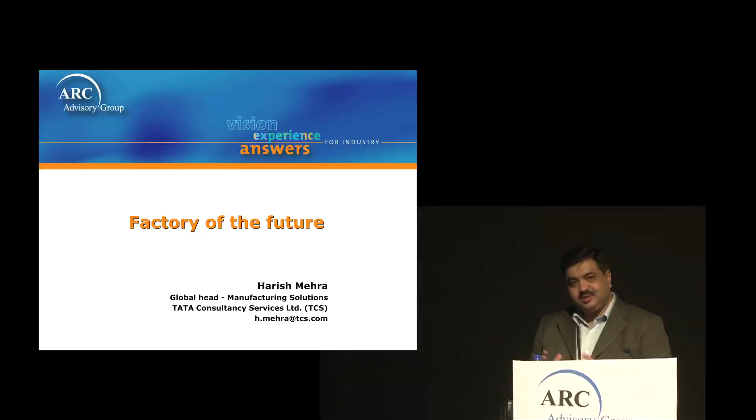Thanks ARC for conducting this session, giving us the opportunity to share Factory of the Future as a concept. We have a very good first half session. A lot of technical know-how has already been shared in terms of what is happening in the automation space. My attempt would be to thread all these pieces together to create the plant of the future.

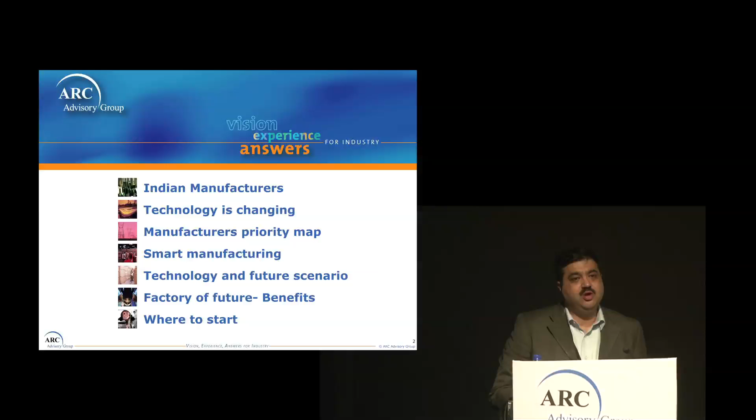Second important aspect is the usage of technology, which is IT, in plants. And IT is becoming more and more important to remain competitive in the marketplace. Technology adaptation in the plants, in all this.

I'm just sharing some statistics with you. India, many reports talk about how we are increasing our innovation in domains like biotech, pharmaceutical, auto tier 1 manufacturing, even in assembly operations. The norms of the industry are changing because most of these organizations are getting into a global context also.

Operational excellence is now becoming extremely important; it is no more a fancy feature for the manufacturers. It is becoming a norm of the industry.

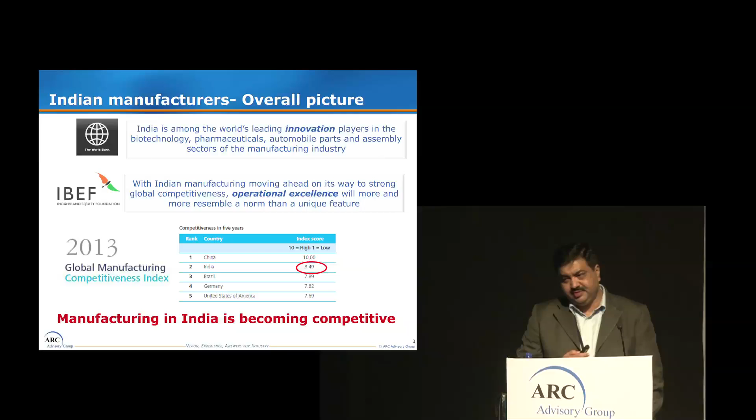There is also a survey note from the Global Manufacturing Competitiveness Index, which talks about manufacturing competitiveness across various countries. India today stands fourth, and in the next 5 years there is a projection that India will move to the second position in all this.

There are many factors which influence manufacturing competitiveness - internal factors, external factors - but the most important factor where we lag very badly vis-a-vis other countries is physical infrastructure. This physical infrastructure has more than 20 different elements, but among the top 4 is IT and telecom, apart from availability of good quality electricity and other infrastructure needs.

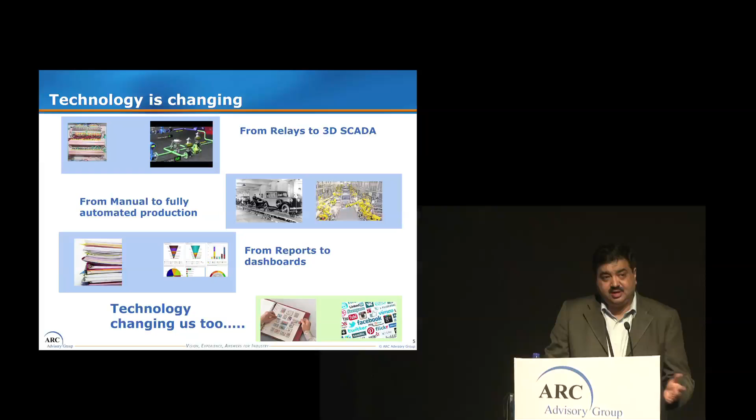The whole attempt of this session is to see how IT can make the difference. But before we enter into this technology, let's have a look at the technology which is emerging in typical plants.

I remember when people would go to the plant, go to the equipment, take the analog reading, and note it down on a piece of paper. Today, some of our potential customers are demanding that they can see, sitting here, visualization of that information. So it's a sea change.

I myself have commissioned plants using Mimics and the control board. Today we are talking about the ability to control something sitting remotely.

There are many changes with the information which plants generate. Traditionally, people were talking about information used for generating reports. We are talking about how these reports can be converted into dashboards, and if the dashboards can do some prediction associated with assets and all.

Many previous speakers have covered these points - so important is technology in manufacturing, in plants, continuously changing and improving. It's a matter of adaptation of these technologies and how you want to see business imperatives are met.

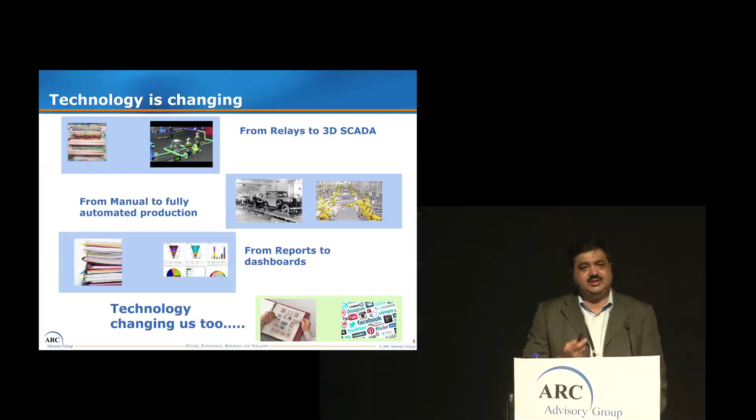A typical manufacturer, even the executive management, faces tremendous pressures when it comes to the manufacturing environment. Compliance and energy efficiencies are definitely there. Because of globalization issues, plants are under pressure to bring visibility to decision making, since these plants are in the middle of the whole supply chain processes, and the make process makes it very critical - if I'm not strong in that piece, the business is not that good.

Cost pressure is always there for manufacturing facilities, for plants, and the prime reason is a 1% improvement you do directly hits the bottom line of your balance sheet. So it becomes an obvious choice for CFOs, CIOs, and CXOs to look at how best we can improve on this.

Innovation is one more important aspect, with respect to the products which you are introducing in the market. It can be next generation technology, or it can be disruptive technology. But you can design a single unit which can be special - making it commercially available, and in a global context making it available across geographies, is a challenge.

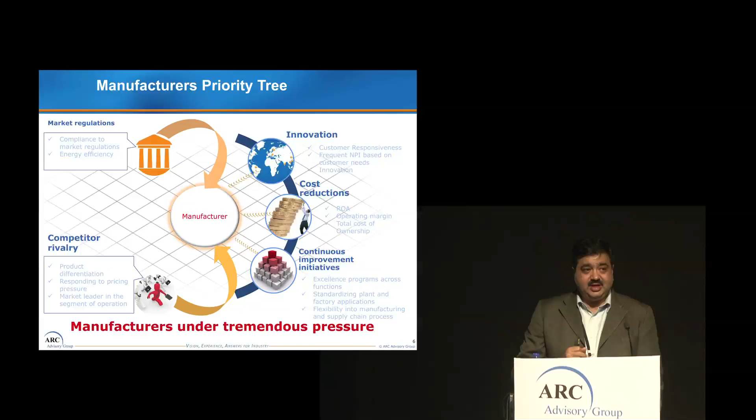We see - I can give you a very simple example. P&G makes these diapers. If one change in the diaper specification takes 4 months to launch globally, by the time the whole market is gone. So the whole new product introduction and keeping the differentiation in the marketplace is important.

And it's only possible when plants are enabled to the next level. Continuous improvement, the investments which you have made on assets, return on those, improving inventory turns are other critical factors which keep getting monitored by management people.

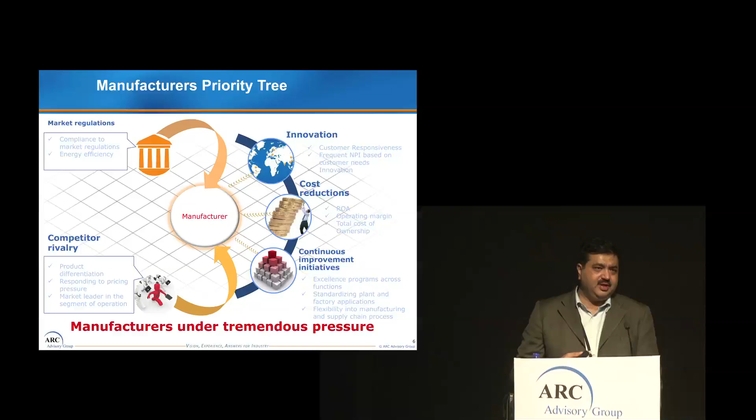Now, how are we going to achieve this? We are introducing a word - we need smart manufacturing, or we need smart plants, for all this. This is a typical diagram of an integrated enterprise, and let's see what are those attributes which we are discussing since morning.

I'm just summarizing those through this. A good manufacturing facility is tightly integrated with their business systems, and they are adaptive in nature because demand is not constant.

Gone are those days where you produce, you stock, and you have a sellable market for all this. So you need to see how plants can adapt to demand changes and vice versa. If there is a downtime in your plant assets, how can that information impact your order fulfillment process in supply chain.

Today, everybody is talking about well-connected plants. In order to have effective energy management, plants should be connected within their own facilities to their suppliers, so that any change you make in the plant is in conjunction with the supplies you're supposed to get from your supplier communities. And in the whole process, what you're trying to achieve is reducing your inventory, which is indirectly related to your cash flow cycles.

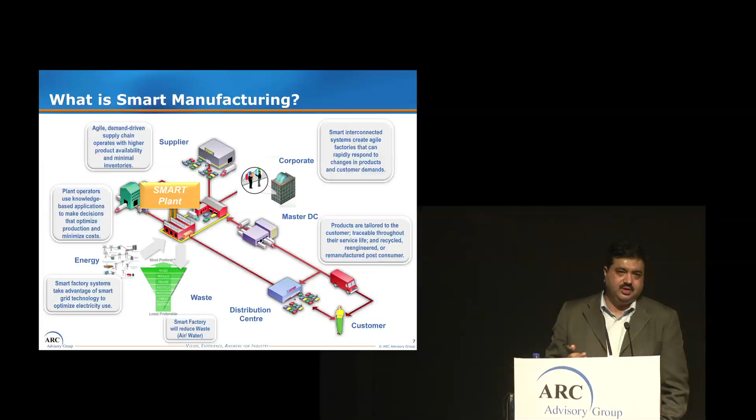Another big aspect is customers are demanding a lot of traceability across the value chain if there's an issue with the product. You might have heard of the callbacks Toyota is making, or the drug issue with Ranbaxy. If they are smarter, they'll be able to pinpoint the exact batch on which the correction or what went wrong applies.

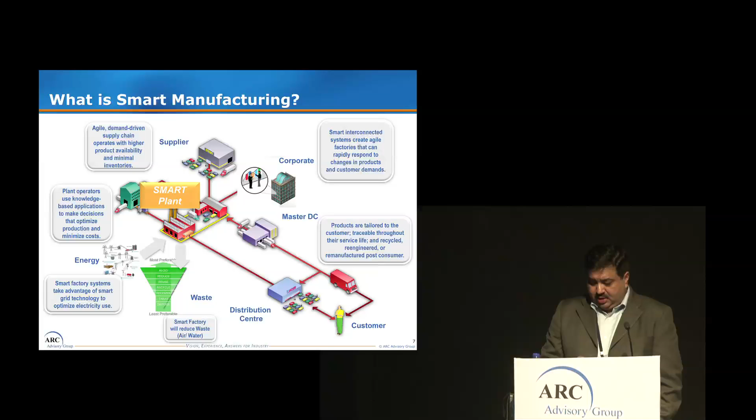Now this is not easy, and it's only possible when the plant from inside is smart. We talk about all these peripheral systems where it needs to interface, but the foundation, which is the plant itself, should be intelligent. And it's not easy at all to make a plant intelligent. My colleagues were talking about complete integrated engineering of plants all the way to controllers.

The reality is, within a single plant, you have maybe 4 or 5 types of controllers. Because the plant uses different processes, and there are inherent benefits of certain technologies which are better, and maybe you're buying some equipment that already has a tie-up with some company, you finally land up with multiple controllers at the plant floor environment.

Today, a lot of discussion happened on the sensors which are actually sensing devices, or the instrumentation sensors. They are enriching more and more embedded technologies going into these sensors, and there is pressure on the plant networks to transmit more data.

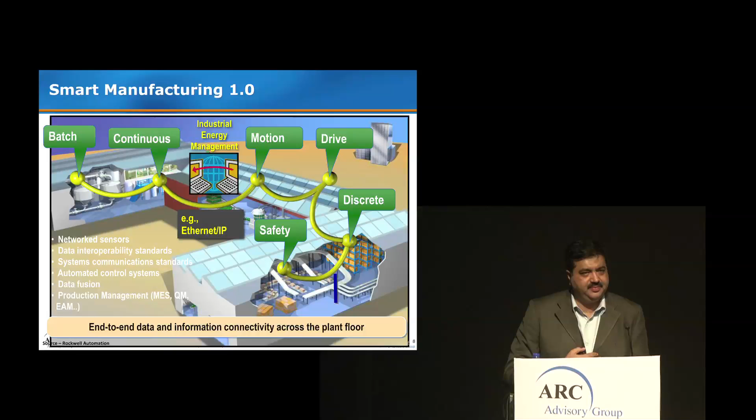Second important thing is plants don't have a single ERP, like one Oracle or one SAP. So finally you land up with multiple applications: some doing production management, some doing asset management, some doing quality management systems.

They are all referring to the same asset in a different form, in a different context, and they also don't talk to each other. So there is a second level of need to make plant applications communicate to each other by using, say, architectures like service-oriented architecture, where you can manage the master data information of the plants, of the plant equipments.

So finally, you land up in a situation where you have end-to-end data. Now, since morning we are talking about data, but we are talking only the data which is generated by sensors and the controllers. What about those data which is generated by my CCTV camera which is installed on a kiln outlet? What about those image processing systems which is generating the movement of the paper when I am actually winding it? So there is a lot of unstructured information also which exists in plants.

And I will cover that in my big data discussion, how that additional information can be used. Now with networks like this...

There was a discussion on remote monitoring. Now with networks like this, on the same network, I can transmit data, I can transmit images, I can transmit voice. So it's not only the trends which you are going to see in a remote location. A web camera can actually be focused on the crack of the asset. You can actually monitor it sitting 200 kilometers away. And you can pick up your phone and actually talk on the same network to talk to that guy. So today, futuristic plants are talking, enhanced by using technologies which are well established in business systems.

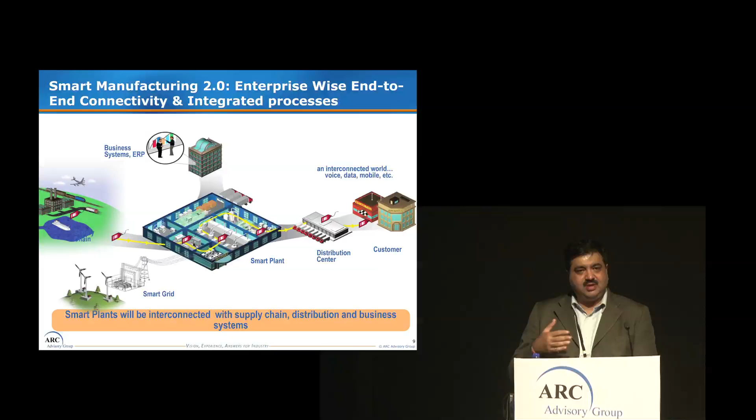And last but not the least is the data which is generated by the plants. Now this data needs to translate into information. This information needs to translate into knowledge, and this knowledge needs to translate into wisdom. Now, how I will generate the wisdom and how I will convert all this data is by putting the data into a context.

Now, once the data is in context, and this is what we are traditionally doing, generating MIS reports, reporting what went wrong, reporting it back to the management. It takes 30 days, maybe 2 months to collect all this and generate it. With the foundation which we discussed in Smart Manufacturing 1.0, we can actually enable it very fast.

This information needs to club with the business system information to do a lot of analysis of this information, which can finally be converted into dashboards and KPI monitorings.

Visualization can be role-based, so you can access the data as per your security, as per your profiling. A VP of an operation wants to see data in a very different context than an operator. So all those things can be managed if the structure, if the foundation, is like this.

And the most important, which the previous speaker has also talked about, is the ability to do predictive analytics. Mr. Andy and other people have talked about, can I run the plant with the past data? Can I simulate those mimic operations and do predictive analytics about the possible failure of an asset, which is a direct loss, a waste and direct loss to my capacity, or it can be in conjunction with the quality. Again, it's a waste because any defect or rework which you want to do will impact your throughputs or the efficiencies. And it can also be related with your energy, the energy patterns, and the ability to predict that this will go and improve further.

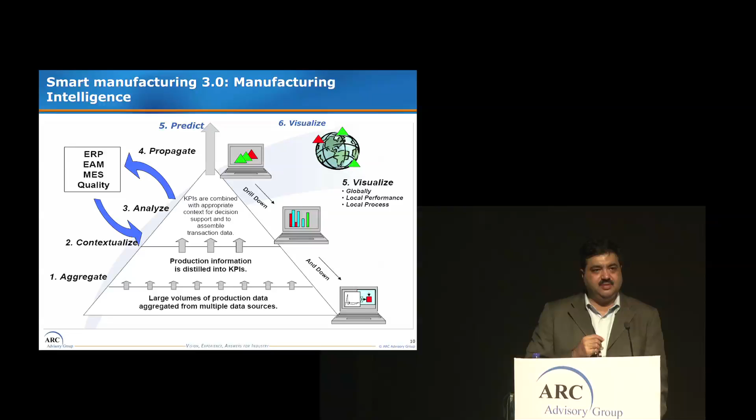I'm not going to talk much on the new concept which is emerging, which is machine-to-machine connectivity, propagated by almost every country, whether it is Singapore, Germany, Europe, America, everybody is talking about Internet of Things. Just as a very small introduction, because there is a very detailed session tomorrow, the world is treating everything as sensors. This bottle might have a sensor, your phone has a sensor, your asset has a sensor, even a BP machine will have a sensor, a CT scan can sense.

And all this is happening because a lot of embedded technology is going into this. Today, if you take an example of a car, I think it has more electronics than steel, and it can transmit a lot of data.

Now, this data is unused until you use this information effectively, for the monitoring purpose, as well as for the diagnostics purpose, and maybe for the predictive analytics purpose.

We are talking about smart products, a product which can transmit this information, a smart plant which can produce this smart product, and the services which can be enabled, which can be remote monitoring and diagnostic kind of services, built on top of it.

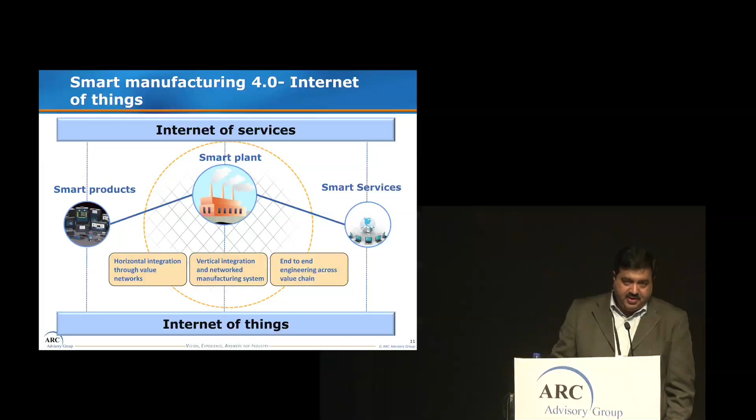Think of a BHEL turbine installed at an NTPC location, and the turbine has the intelligence to transmit data from the NTPC facility. And people can do analysis which can lead to giving information back to NTPC that these are not the engineering parameters on which I have decided this turbine.

So you better increase this pressure or increase this temperature. Or you can do the analysis for the improvement of the design of the turbine itself.

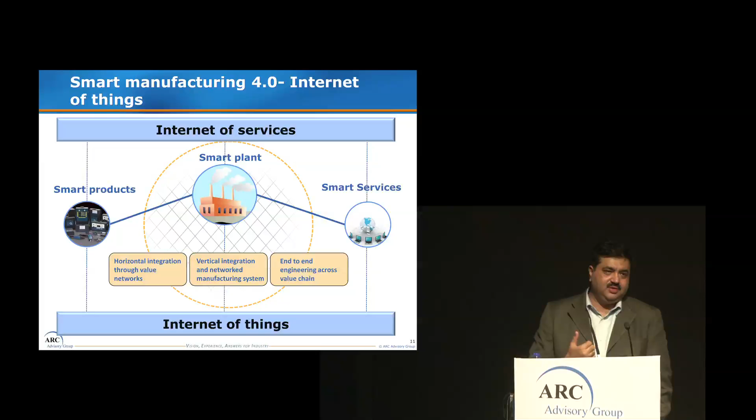So this is all possible today because technology is helping, or Internet of Things is helping you to achieve all this. Now there is a fusion and a lot of jargons, and this is maybe a slight constraint. My colleagues have put in these numbers and I can fill it with so many other pieces of information also.

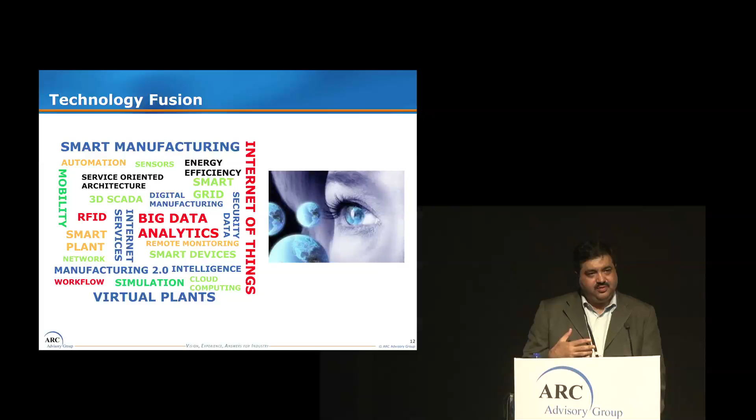There is a fusion - RFID, 3D tagging, 3D SCADA systems, energy management, smart grids, virtual plants, virtual digital manufacturing facilities and all. These are all technology fusions which people are adopting for operational excellence and for innovation needs.

A very good example is digital manufacturing, where today you are not setting up the plant on an Excel sheet trying to balance two different lines, identifying the capacity constraints, but you are actually building the whole prototype of the plant itself.

And why only the plant? I can actually take the whole supply chain network. I can take your numbers, your growth pattern, which you have projected or your CEO wants to project, and simulate all those situations upfront, telling you this is possible, this is not possible, this layout is good, bad, you need more space, taking a capex or opex decision on whether you should do it now or later.

So technology is changing all this. It has changed the product space. Today, manufacturers like Toyota don't want to crash a physical car to tell you what the data is - they can actually simulate all this.

We are talking about all these technologies coming all the way down to plants where you can simulate material flow, and in future, who knows, there will be chemical models available to know the behavior of a boiler, or with the data you can actually simulate and develop all this.

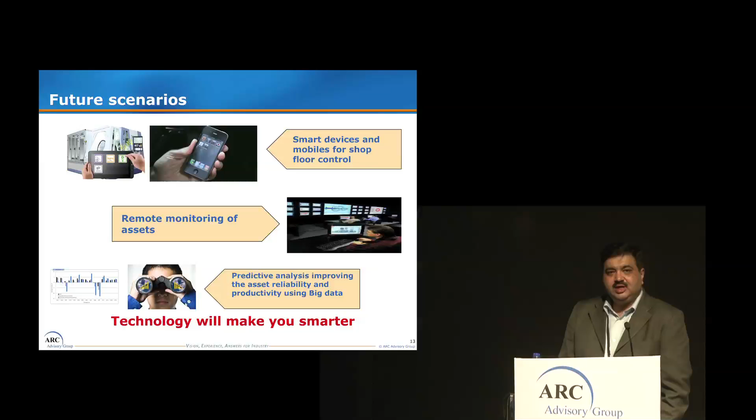We definitely see smart devices and mobility impacting the plant floor. You can think of view anywhere, operate anywhere. It is possible - we are deploying these solutions as TCS with some of our customers.

Remote monitoring and diagnostics - there was a discussion which is read-only. That is very much possible. We are today, in our own office, monitoring all the chillers at TCS buildings at the Pune facility in a cloud environment. I can tell you exactly, every minute, what happened to that chiller.

And another most important thing where the entire focus is going is predictive analytics. And why predictive analytics? It's because we are not in that world where we want to postmortem things and then improve. We want upfront, because data is there, to know upfront what is going to go wrong in future.

And here, these analytics don't restrict your thought process only to time series data, or just the sensor data of the PLCs and controllers.

You can build this with unstructured information, and you can use traditional models, statistical models, and all other models. You can also use big data techniques to do this analytics and model building, which will reduce your resource requirements. It also allows you to manage a variety of information, which can be time series, which can be RDBMS data, which can be unstructured information. Big data is actually changing all these aspects.

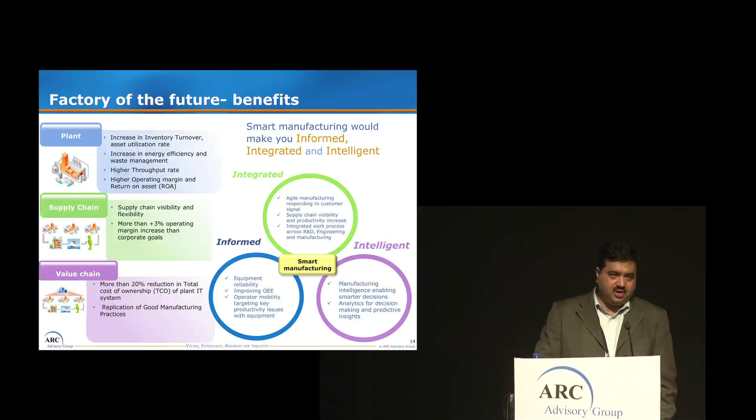And not only benchmarking, but generating good practices out of it, which can further improve other parameters, and which other plants can actually adopt.

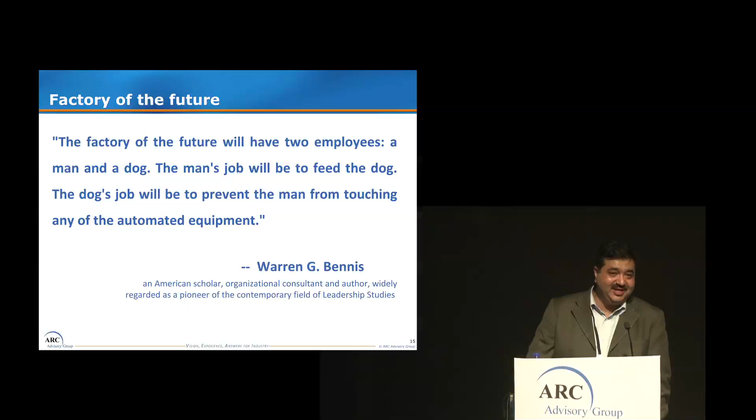This is the saying of one of the scholars - I don't know in which year this will be realized - but they say the plant will be so highly automated that there will be only two physical employees: one is the dog and one is the man. The man is going to feed the dog, and the dog is going to keep the man away from touching the equipment. That's the kind of dream global manufacturers are going with.

Now, of course, it's a transformational journey. It's not simple, and you need to take baby steps to realize the benefits. These are multi-million, multi-year programs which give you delta incremental benefits, but you need to carry a bigger vision of what you're actually trying to achieve.

This is the stepped approach, and on the same approach we have built a comprehensive framework to help our customers achieve these objectives. The plant is the foundation, the place where data is authored, and it needs to adopt different systems for its own benefit.

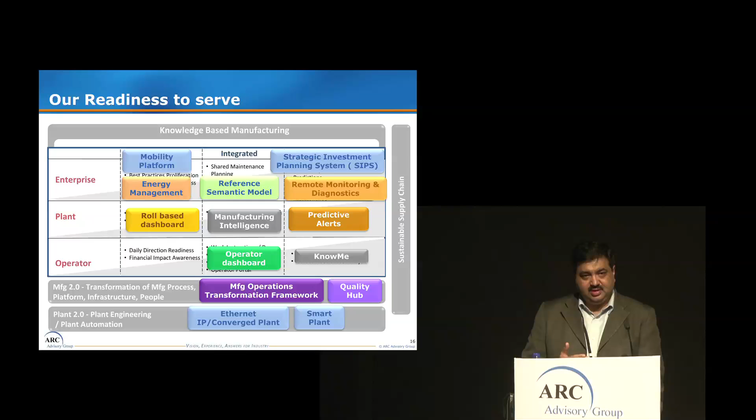And then you require the manufacturing operation transformation, connecting systems together. The people change management, the way they are actually running these plants to the next level, and maybe technology also plays a major role.

And once you have the data, you can actually visualize it in multiple contexts. You can think of data as just information to start with. Gradually, you can look at the data in an integrated environment, and then you can make the data intelligent, which is nothing but your predictive analytics.

This is some of the representation which we think can vary from customer to customer, domain to domain. So it is a very generic representation.

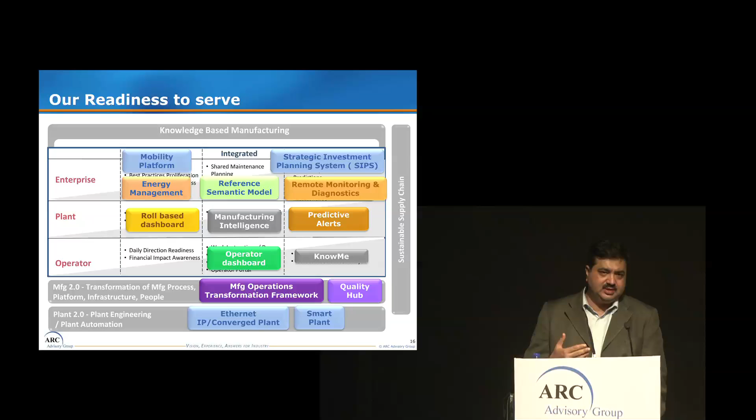In order to address all this, we have built many internal assets with our research team in Pune, TRDDC. They have their own algorithms, and they are helping us build those models. There are certain assets which are reusable to give you that jump start in taking this transformational journey.

We also collaborate with strategic partners like Cisco, which helps you migrate the plant infrastructure you have today to the next level. There are many new technologies coming for plant engineering also. Smart plant is one.

There is a presentation tomorrow from Siemens - they also have a parallel tool. These tools help you do what we discussed in the morning session: all the mechanical, electrical, P&ID, and control system engineering put together. So the whole product lifecycle management for the plants can be managed.

Now it's a stepped approach. It cannot be taken as a big bang like a transaction system. It cannot be forced either, the way SAP is forced by CFOs.

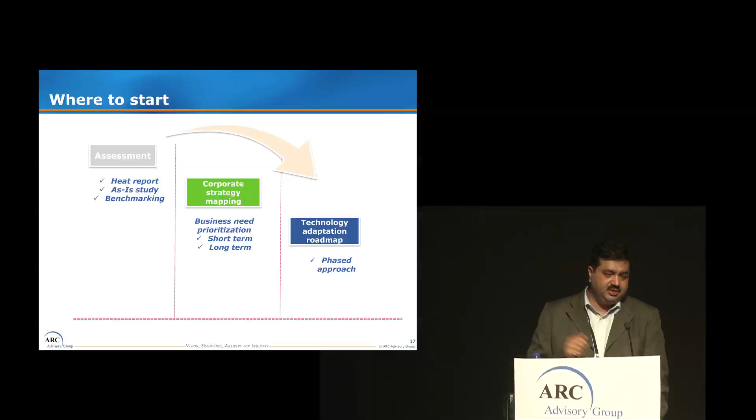The logical steps we can think of: we need to do an assessment of where we stand today versus our vision, generate a heat report, identify what is critical for business and where the gaps are high, and prioritize short-term and long-term objectives based on business objectives, then create a phased roadmap to achieve this. That ends my presentation. Thank you very much.